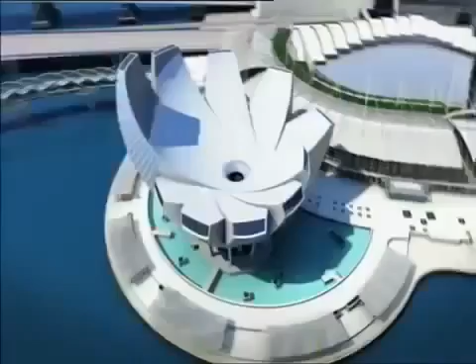Singapore's Marina Bay Sands is one of the world's most complicated construction projects. Engineers have to build not one, but 3 skyscrapers that will shoulder a sky park as big as an aircraft carrier. Worst case scenario, we get stuck. They have to devise ingenious solutions to assemble a 60-meter tall museum of impractical dimensions, install giant artworks, and erect seemingly floating pavilions for shopping and entertainment. If engineers succeed, they will create a virtual city unto itself.

Singapore, the Southeast Asian country, is smaller than New York City. The lack of space forces it to build its largest leisure and entertainment hub to date on a small tract of reclaimed waterfront land. The Marina Bay Sands. It's not one megastructure, but many.

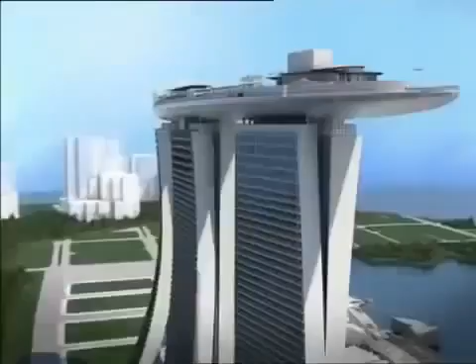Serious challenges lie in the array of buildings that form the unique complex. 3 55-story hotel towers slope at such great angles, they're in danger of buckling under their own weight. An even bigger problem is the hotel's roof. A 340-meter sky park spans its length, containing gardens, outdoor pools, and the world's largest cantilevered observation deck. But how do you build something as big as an aircraft carrier, 200 meters in the air?

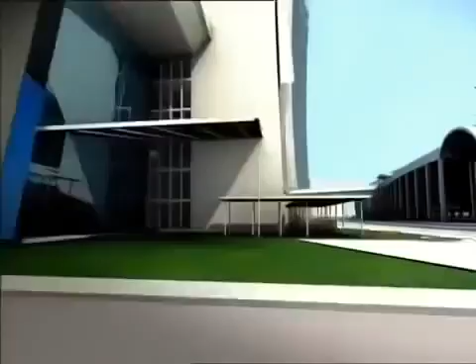In the hotel's atrium, mammoth works of art have to be somehow incorporated into the architecture. Its challenging centerpiece, a 15-ton mass of steel by a renegade artist from Britain.

A 60-meter tall art science museum is designed for maximum visual impact. It will be to Singapore what the Opera House is to Sydney. Only one problem: it seems too impractical to construct.

And a set of dramatic glass-encased pavilions, while themselves pose little challenge, have to be built in water.

The man behind the Marina Bay project understands the risks, but he believes that anything short of astounding will fail. Sheldon Adelson, one of the world's richest men and CEO of Las Vegas Sands Corporation: what we hope to accomplish is to change the face of Singapore tourism, so we expect a very successful development.

That is by far the largest and most expensive single project we've ever undertaken. It'll cost about 5 to 5.5 billion US dollars. It's a lot of money. Now, I know $1 billion doesn't buy what it used to, but by any measurement, it's a lot of money today.

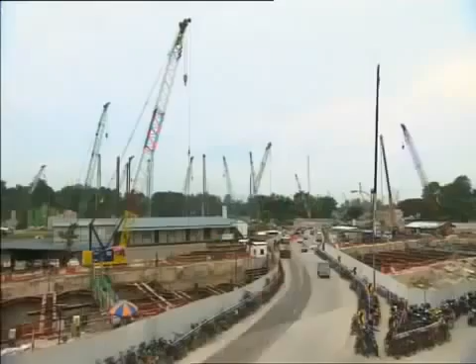On the ground, engineers are more concerned about the reality of building Safdie's vision. This is the North Retail section area. 30-year veteran John Downs is in charge of overseeing the entire project. The design is very, very diverse, and each component of the project is totally different from the others. For a project of this size, you'd expect with the planning, with the design, with the construction, you'd be expecting somewhere between 6 to 7 years. Here is basically a 3-year turnaround.

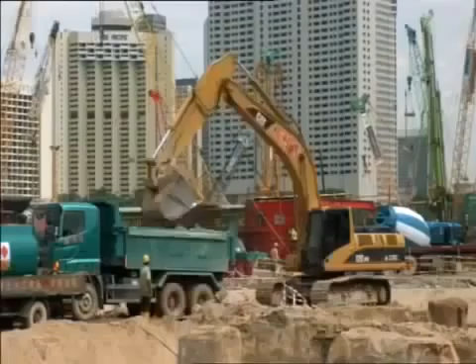The first and most critical construction task is to secure the footprint, though this normally straightforward job proves otherwise, since the site was originally allocated for boats. The complex sits on 560,000 square meters of reclaimed land, part of a decade-long plan to revamp Marina Bay, a former saltwater estuary that's now a freshwater reservoir.

Beneath the reclaimed land, which is essentially a seabed, is a dangerous layer of marine clay. Sometimes called black toothpaste, marine clay has very poor structural properties. If not given complete respect, the unstable marine clay is potentially fatal.

In 2004, Singaporeans discovered the lethal consequences firsthand. A routine excavation in an underground tunnel for the mass rapid transit network causes a collapse, creating a gaping hole in the Nicoll Highway, killing 4 workers.

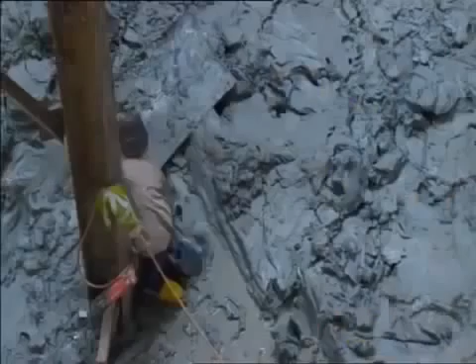The ground conditions in which they were building the Nicoll Highway were not dissimilar to those in which we are encountering here. They had also soft clay, they had similar depths of excavation between 20 and 37 meters. One of the big things that was learnt in the Nicoll Highway collapse was the importance of monitoring movements and the control of quality as the construction proceeds.

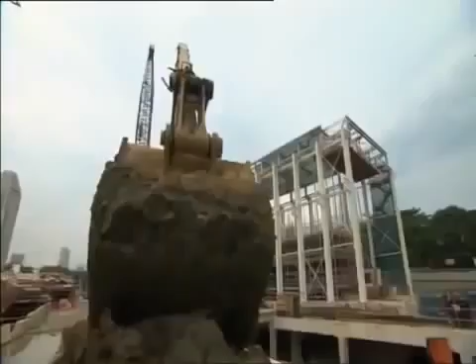Marine clay is an old foe of engineer Mike Barton. He's defeated it in the past by understanding how it behaves. The big problem with marine clay is that it is so soft that when you dig out the inside, the walls will move and potentially collapse and allow all the surrounding water in the bay into the excavation. So, before work can begin, the unstable building site needs major fortification.

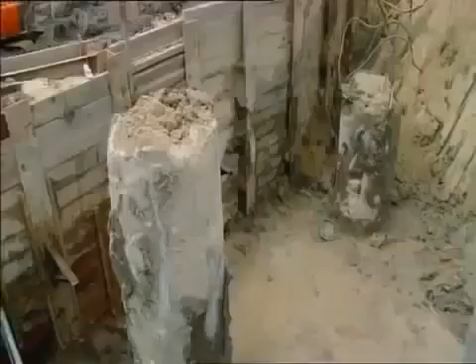To combat marine clay, engineers decide to build giant concrete walls to create stabilizing perimeters for the larger buildings, known as diaphragm walls. Up to 1.5 meters thick, diaphragm walls are steel-reinforced concrete sections, pounded 50 meters into the ground. They form watertight enclosures for men and machines to work round the clock.

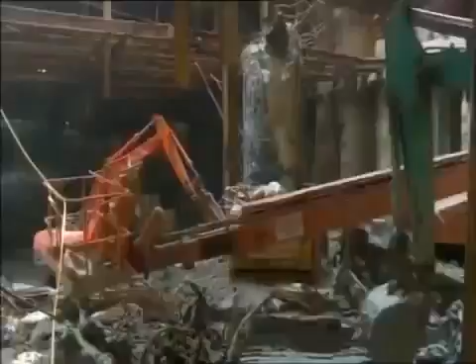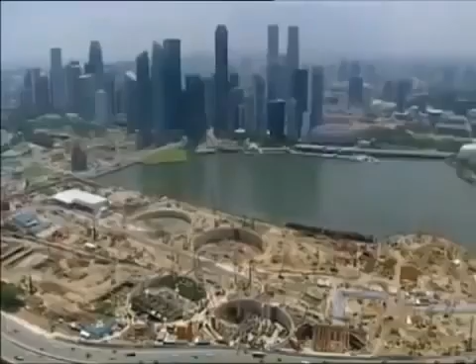In just 1 year, over 4,000 meters of diaphragm walls help produce a rock-solid foundation. The diaphragm walls we constructed in a formation we called a peanut formation, which is 2 circles joined together, and a donut formation, which is circular, are able to withstand very large forces from the marine clay without any movement. They encapsulate an area bigger than a football pitch, enabling us to excavate very quickly and build structure up very quickly.

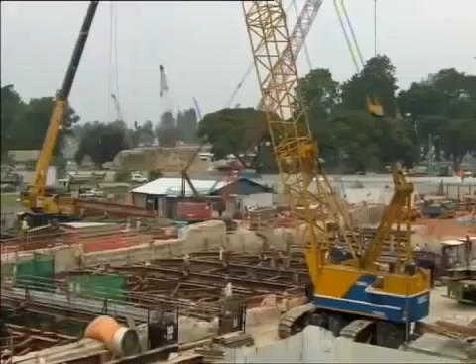Securing the footprint of the Marina Bay project has already taken a year out of John Downes' schedule. He now faces the difficult task of erecting the resort's many buildings in a space of just 2 years. Just managing the whole logistics of that, including the construction methodology, is very, very challenging for us.

To meet his tight deadline, Downes chooses the most direct solution. He hires 16,500 workers to construct every single building simultaneously. It's like leading a small army, so organizational excellence is key.

We're just on the edge of Singapore in the CBD here. So rather than lose the contractors and the workforce to go off-site, we built our own 3-story project office. We have all of our contractors, our subcontractors here. We house our resident site staff. We have our project management team, our construction management team, our design management team, and the logistics here.

Come lunchtime, the monster workforce creates another massive challenge for Downes. He responds by building one of the world's largest site canteens.

We've got 13, 14 different food styles here. You can see by my shape and size that I eat here every day. I enjoy this food. So here you can see the project bakery. It has its own ovens. It's set up for breakfast. We cater for sandwiches during the course of the day. Can I take a sausage roll, please? So, freshly cooked food, straight from the oven. We stand by our products.

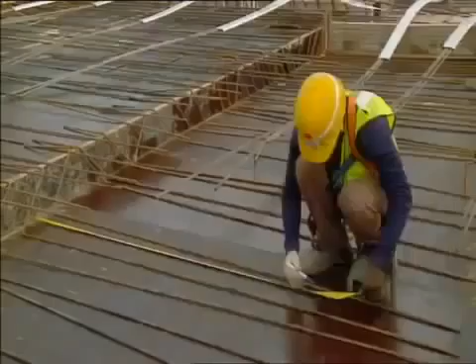The tight schedule also creates problems at the hotel towers, where engineers are already struggling with a congested site. The important thing to do is to make sure they come in and deliver the goods straight away and then get out again. We don't want too many vehicles on site at the same time.

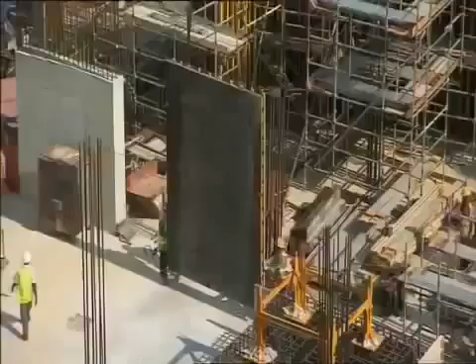To speed up construction and alleviate traffic congestion, engineers turn to a method proven countless times in the field: precast concrete. Hotel walls are made off site in the thousands. Workers laying the floors are so proficient, they produce 1 floor per 4-day cycle. It's an impressive display for a conventional solution.

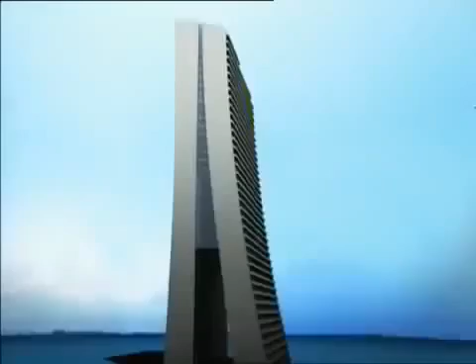But the structure they're attempting is anything but conventional. The key challenge of building the hotel towers is its unusual design. Unlike other skyscrapers, part of the towers slope at incredible inclines. Like a set of collapsing dominoes, the towers could buckle under their own weight if a practical building solution is not found.

It's a major concern for engineer Craig Glover. I've been in the industry for 25 years, done a wide range of projects in many different countries, but nothing compares to this whatsoever. There was nothing we could take reference from across the street, on the next high rise, or across town. This is a new frontier.

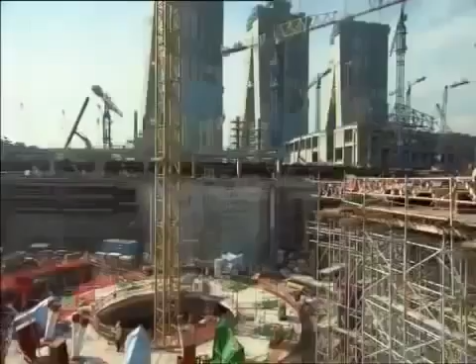Costing a staggering $5.5 billion to build, the Marina Bay Sands could be one of the world's most expensive mistakes if engineers can't solve the tower's problematic structure.

Engineer V.C. Cheong leads the design team, and their solution comes out of left field. If you look at the configuration, it's not a straight tower, it's with a sloping leg. So all this sloping leg actually induces a very huge external force onto the structure. We kind of built it without any support, so we actually formulate a solution to prop up the sloping edge.

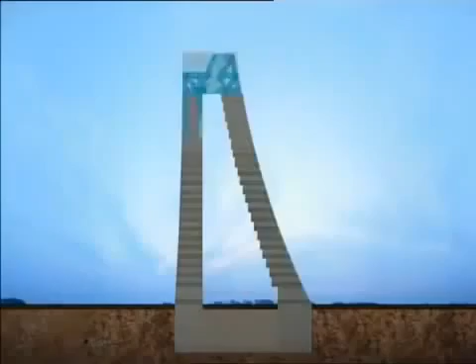Using a technique they've never employed before, engineers build large temporary struts made of strong structural steel. They prop up the sloping towers as they rise. Like a suspension bridge, high tensile steel tendons, also known as tension cables, give an added layer of support inside the walls. In theory, both the struts and the tension cables are temporary and will be removed once giant link trusses connect the towers at the 23rd floor.

The sheer weight in concrete is enough to topple the towers at level 8 if the engineer's calculations are wrong. To reduce the chances of failure, Glover and his team make a radical decision.

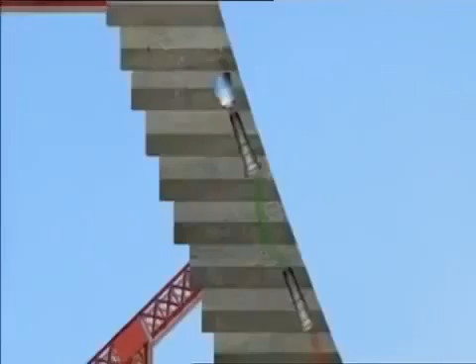Instead of removing the temporary tension cables in the tower walls, they make them permanent supports. I feel good it's in there because it's added strength, it's added support.

We have a twined network here of high-strength steel, and what we do is we bundle these up so they form a cord with multiple strands inside this conduit. We place this conduit inside the walls prior to casting the concrete. So what we then do is once the concrete is cast, we anchor one end into the concrete.

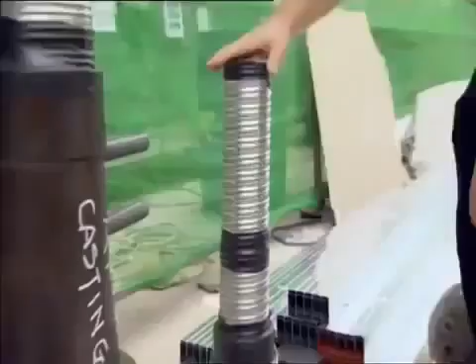So we then put a very high-strength hydraulic jack onto the collar and one by one pull these strands through and tension them up. What that does is basically pull the building back and hold it in place. If these cables were to suddenly break, or if they weren't in place, we wouldn't be able to control the self-weight as we build more and more of the building up. So it's a very important part of the actual engineering of the solution to hold the building in place until we can connect it.

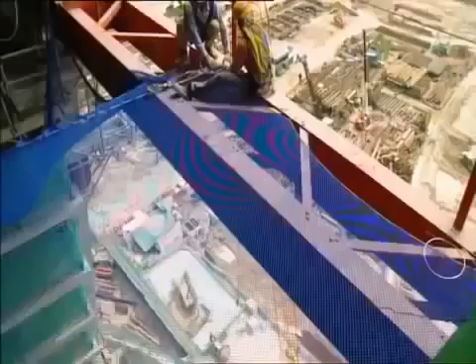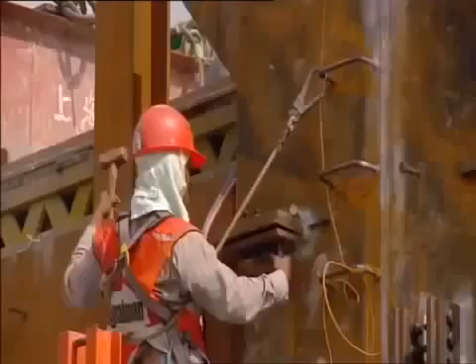Despite the team's quick thinking, the true test of their engineering decisions will only happen once the main support struts are removed and the massive link trusses installed. Link trusses are huge reinforced steel brackets that bind the towers at the 23rd floor. Once their installation is complete, they transfer the sloping tower's weight completely away from its temporary struts.

Once we're satisfied that we don't have any stability issues, then we can bring the large hydraulic cranes in and member by member start to dismantle the struts. We've got a lot of time pressure, so we've just got to make sure that these things keep moving. It's done its job holding up the building, now it's holding up the job.

As the last pieces of support struts leave the site, Glover and his team can finally breathe a sigh of relief. The link trusses are holding the building load. So far, so good. It's a lot of theory, a lot of calculations, but until you really do it and really get it out of the building, you never quite know. I'm always waiting for the phone to call in the middle of the night that something's gone wrong.

Not all the structures have ended up according to plan. The 60-meter-high ArtScience Museum is facing a major design overhaul. Planned as a venue for blockbuster exhibitions on the arts and sciences, its bowl-shaped roof doubles as a 3,000-seat amphitheater.

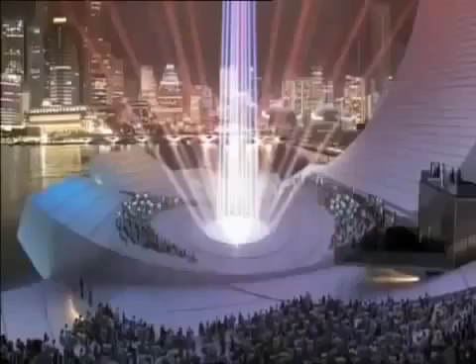Unfortunately for engineers eager to start its construction, architect Moshe Safdie isn't happy with its current shape. Somebody looked at them and said, looks like a bunch of bananas. In fact, Mr. Adelson said it looks like a bunch of bananas. I said, well, if they look like a bunch of bananas, we're not there yet.

It's terrible news for Safdie's design team, especially its principal, Gene Dyer. There are times that Moshe will come in with an idea. We think it's quite exciting. We'll pursue the idea for weeks or even months. He'll come back and say, I want to change the idea. And we've already bought into the idea, so it's a bit frustrating.

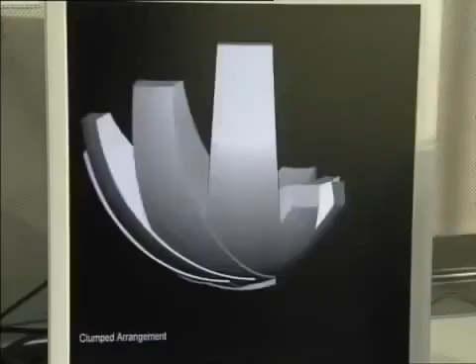To rework the unique geometry and dimensions of the ArtScience Museum, Dyer and his team turned to advanced 3D modeling programs. It not only makes navigating the museum's complex geometric patterns easier, it shortens the process to a matter of days. The model is dynamic and it can be moved by just changing one or two elements. Moshe could experiment, making rapid judgments in a very short period of time about which way he wanted to take the project. This is a process that was impossible to do 10 years ago. Without the computer, this would take years and years and years.

The nautilus form effectively became... To rationalize the new look into a buildable structure, architect David Robbins splits the museum into spheroid segments. We began to look at using different spheroids to define the different upper and lower surfaces of this building. That gave us a very rational way of describing the plan form to our clients.

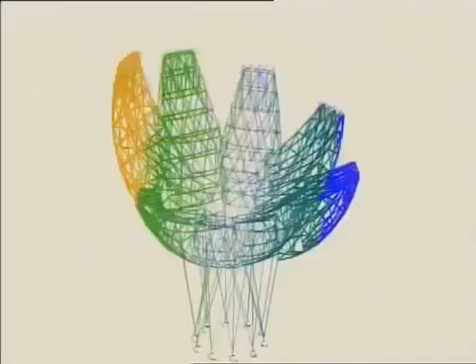After months of refining the design, Safdie is finally happy with the result. The mathematical precision that we gave them made them even more beautiful. It led some people to say, well, hand of welcome. Others said, is that a lotus? And the more ambiguous the associations, the closer I thought we were getting to our target. Because I think the least exciting buildings are those which have overt symbolic associations.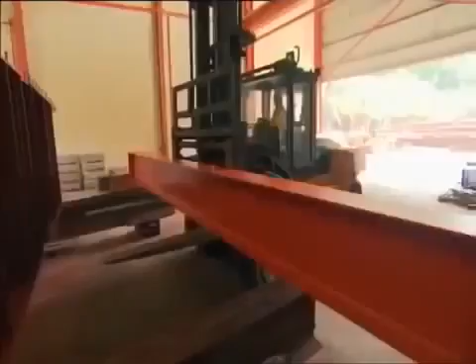Armed with the new design, engineers begin work on the museum's 60-meter-high superstructure. A staggering 5,600 steel elements, weighing some 5,200 tons, are prefabricated to exact specifications. They are then trucked onto site and assembled.

It's like putting together a giant jigsaw puzzle. Each element has to be installed with pinpoint accuracy. If it's even a few millimeters off, engineers will have to start from scratch.

Engineers of the massive atrium at the base of the towers are facing an equally tough construction process.

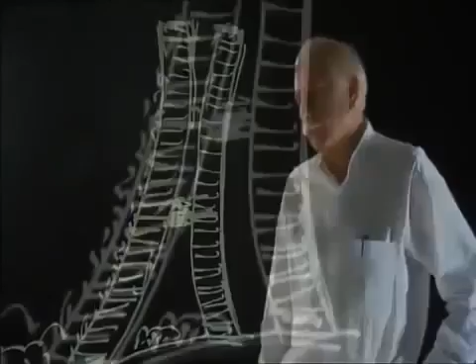Safdie has come up with a challenging design. He wants to inject art into the atrium's architecture, so that visitors will feel like they're walking through a grand Gothic cathedral.

In medieval times, if you think of a Gothic cathedral, there's the architecture, there's the stained glass windows, there's the sculptures on the pinnacles. You cannot draw a line and say art and architecture. Art and architecture are one, they're singular experiences. And I think what we try to do here is come back to this integrative mode.

To create the centerpiece of his vision for the atrium, Safdie commissions renowned British sculptor Antony Gormley. Famous for his unusual approach to art, Gormley is the brains behind the Angel of the North sculpture in northern England.

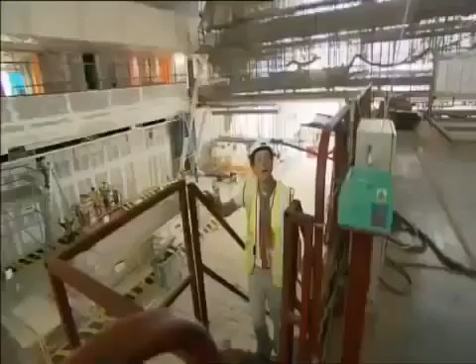What he's about to attempt is proving to be more of a construction challenge than an artistic one. A cloud-like sculpture some 40 meters long, made up of 15 tons of high-grade stainless steel, hung 12 stories above the atrium.

The Angel of the North is, in a way, making a very traditional public sculpture because it's isolated in space at the edge of a valley. You can see it for miles and miles. It's very much about occupying space. This is about activating space. You can't see it for miles and miles. You have to be in the space with it. Each viewer, every person coming out of their hotel room will confront this big chaotic thing and have to find their place in it. I think that's an exciting thing.

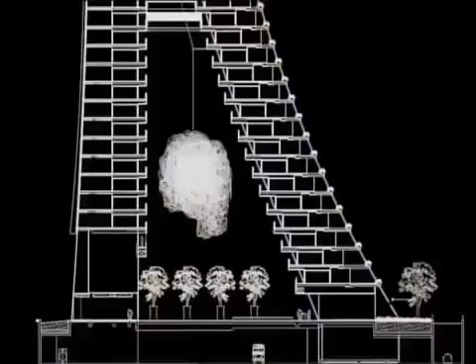Called Drift, Gormley's steel sculpture is so huge and so complex that it can't be sculpted using traditional methods. Gormley's team has to create state-of-the-art 3D computer programs that translate his ideas into buildable plans.

But just as they're about to begin construction, a bombshell drops. September 2008, a global financial crisis wreaks havoc on markets. The flow of the hundreds of millions of dollars that keep the Marina Bay project going every month suddenly stops.

For engineer Matthew Pryor, it's a massive blow. I feel devastated. I mean, it couldn't be worse. Probably the worst day of my life professionally. There's no more money coming through. So unless we put some funding in place or there's something, we're going to have to shut the jobs down. But there's a tough decision to be made, and we don't know what we're going to do just at this point in time.

With the future of the multi-billion-dollar project plunged into doubt, all eyes turn to the man behind it, Sheldon Adelson. The next move of one of the world's richest men will determine the fate of the mega construction site.

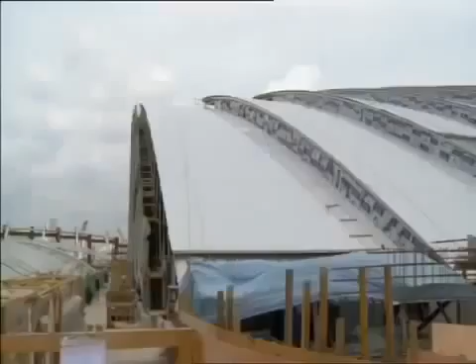The 2008 global financial meltdown is a haunting echo of the 1990s Asian crisis. Back then, progress on Shanghai's World Financial Center came to a complete halt for 5 years. For Adelson, that's simply not an option for the high-profile Marina Bay resort.

His vision of changing the face of Singapore tourism is at stake, and so are billions of dollars of investment from his Las Vegas Sands Corporation. He prefers finding a stopgap solution to weather the storm.

Throughout history, there has never been a trend that went straight up, nor a trend that went straight down. So it goes up and down. It's only a matter of time when things will recover.

In a bold move, Adelson pledges his vast personal wealth to the completion of the project, effectively ending any speculation of failure.

There's a massive sense of relief in the company. I mean, everyone's pleasantly surprised how quickly we've got through this and the fact we could hold it together and get it going again. So euphoria is probably the best way to describe it.

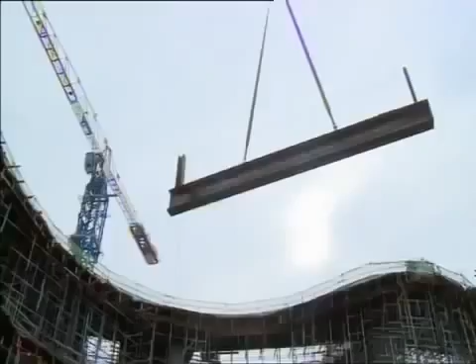With the crisis averted, construction on the 3 55-story hotel towers, the casino, theatres and convention centre resumes at pace. Everywhere you turn, steel is being installed. It's vital reinforcement for every concrete structure on the 15.5-hectare site.

For one project at the tower's atrium, steel is more than just reinforcement. To construct the 15-ton Drift sculpture by British artist Antony Gormley, engineers had to first laboriously prefabricate it into over 70 segments.

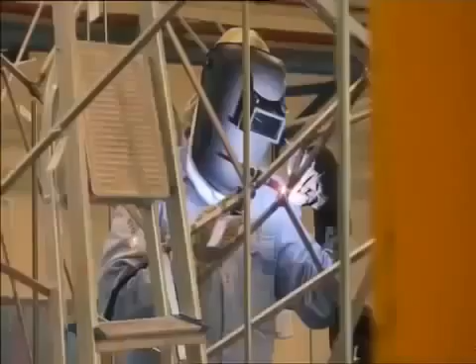The segments are then welded into 8 slices and will ultimately form the sculpture. It's a tricky operation, but engineers are able to complete it swiftly due to a system of codes and numbers that enable them to quickly identify what goes where.

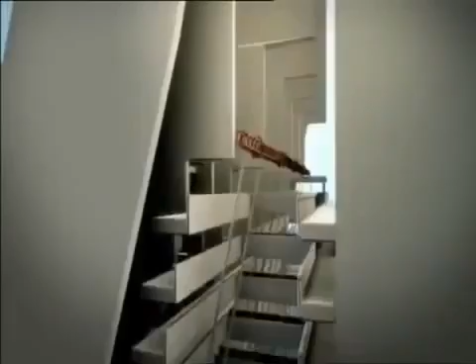Once all 8 slices of Drift are fully assembled, it's lifted up into position by a temporary lifting frame. A massive box truss on the atrium ceiling then takes over the load. In theory, the box truss will support the weight of the lifting frame as it's being lowered down.

It will be a heart-stopping moment, especially for engineer Graham Stevenson. The lifting frame is about 9.5 tons, so when it picks up and gets some momentum, there's a potential that it just wants to flick over and rotate through its full 90 degrees, and we won't have it under control.

Stevenson's solution: 4 powerful automated hoisting drums located at the 4 corners of the frame. They allow workers to control the strength and speed of the operation with high tensile steel cables.

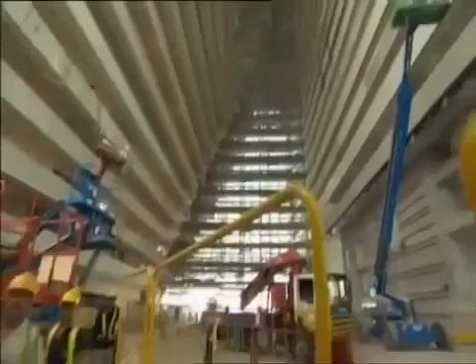A spotter at the top determines the pace of the procedure and marshals the team. With their preparations complete, it's time to face the moment of truth. Sculptor Antony Gormley is as anxious as any of the team.

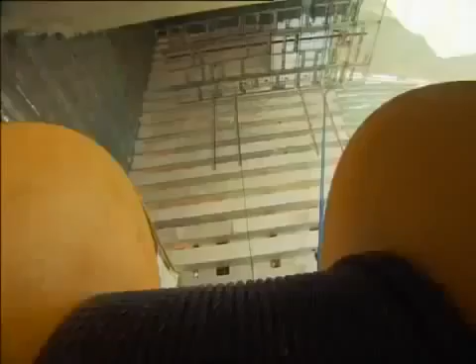The entire operation is estimated to take up to 10 hours to complete. As soon as the frame is in motion, there's no turning back.

Midway through the lift, Stevenson receives reports of a potential problem. 22 story, number 7 temporary cable, scaffolding touching the cable. Why have you got the temporary cable touching the transverse? Is it just the end of a tube? Yeah. So you can just cut the tube? Yeah.

Problem solved. But what was previously an estimated 10-hour procedure now turns out to be a 24-hour marathon lift.

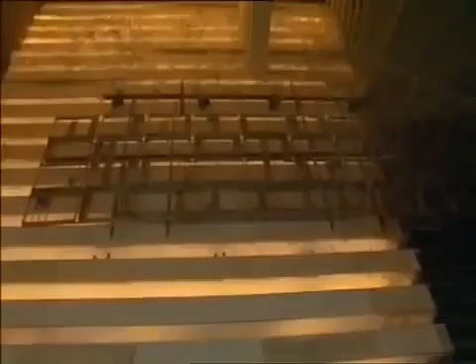At 6 a.m. the following morning, they complete the job. Absolutely fantastic. The Gormley is now finally in its final position, so really an end of a long and exhausting day, and big thanks to everybody, but it's finally done.

While the drift settles into its new home at the hotel atrium, elsewhere attention is focused on one of the project's key features, the Crystal Pavilions. The two glass-encased buildings by the promenade are set to be the resort's premier shopping and entertainment complexes.

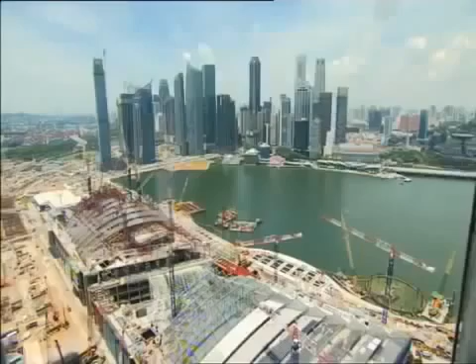But before engineers can make them a reality, they have to secure their footprint. And already a major obstacle threatens to sink their objective. The Crystal Pavilions are situated within the confines of Marina Bay, so to found it, engineers have to find a way to build in 6 meters of water.

The responsibility of tackling the problem falls on the shoulders of engineer Kurt Vella. I'm from Sydney. The underlying foundation in Sydney is sandstone, it's rock. All you need to do is just dust off the surface and you can build skyscrapers on it. Here it's very different. All the structures have to be heavily founded.

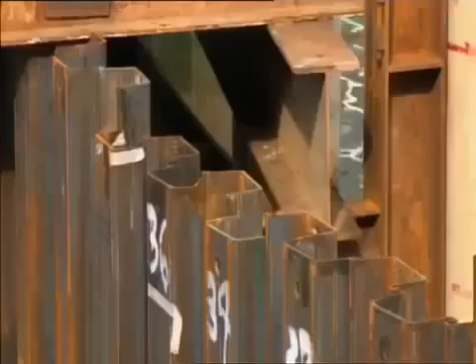To keep water out of the construction site, only one solution seems viable for Vella and his team: a waterproof steel structure called a cofferdam. This temporary formation surrounds the worksite with a circle of steel sheet piles, creating an impenetrable shield that locks out the water, keeping the workers safe within.

For the job, they rope in a 12-ton vibro hammer. It punches the sheet piles deep into the earth, making the cofferdam rock solid and resistant to movement.

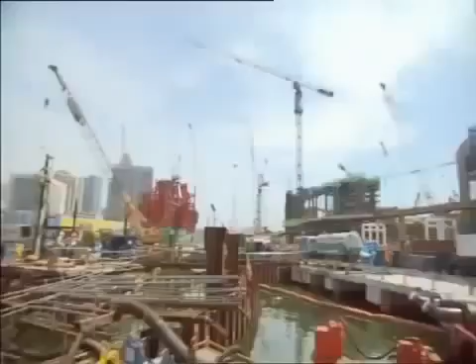With the cofferdam secured, engineers deploy powerful diesel pumps and run them 24 hours a day, ejecting any water that remains within the walls.

This last step comes with inherent dangers. The force of the water outside creates what engineers call hydrostatic pressure. In theory, it's powerful enough to force water through any gaps in the cofferdam.

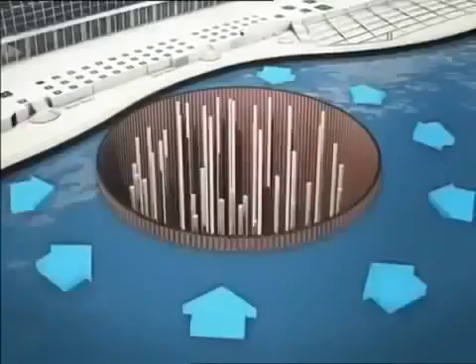It's something that Vella prays will not happen. There's a bit of hesitancy and concern because we've got to build this building in the middle of Marina Bay. Everybody can see what we're doing, so if it leaks, it's a problem. If it fails, if it moves, if it collapses, it'll be an absolute catastrophe.

After a day of pumping, Vella's worst fear comes true. Parts of the cofferdam are leaking.

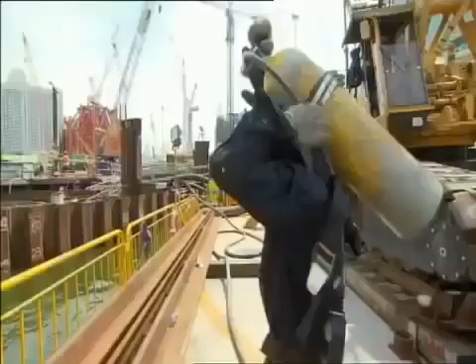To rectify the problem, Vella orders a team of 8 divers into the water on 10-hour shifts. Their mission: find out where the water is being forced in and plug them shut with epoxy resin.

Anson Lee is an 8-year diving veteran. The toughest part of my job is the environment. The visibility is poor here, it's totally zero, I cannot see anything here below. I solve that by feeling the suction and then feeling out the thing. You have to overcome all the fear that you can't see under the water, but okay, I feel proud to be one of this team to build this thing out.

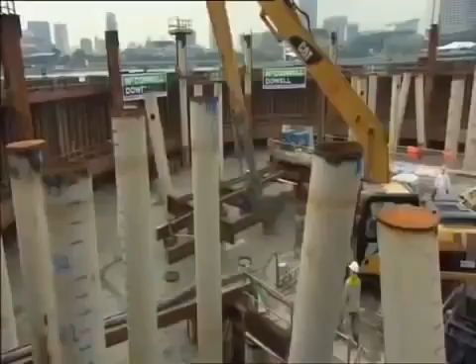After 2 weeks of hard work by divers and the pump crew, the job is finally complete. Kurt Vella can also breathe easy. Every job is different, every job has its challenges. You plan and prepare, you try and identify your risks in advance, and you try and come up with contingency plans. And that's what's really enjoyable from my perspective. That's what gets me out of bed in the morning.

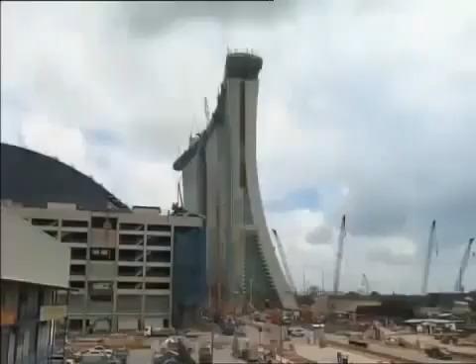After 2 years of battling the elements and overcoming difficult construction milestones, the 3 sloping towers of Marina Bay Sands can finally celebrate their topping off ceremony and move on to the next phase.

But a destructive force of nature threatens to throw a spanner in the works. With climate change predicted to affect the pattern of Southeast Asia's typhoons, Singapore may one day experience the destructive tropical storms plaguing its northern neighbors in the Philippines and Taiwan.

When that happens, typhoon-force winds could spell disaster for the hotel towers, especially the 340-meter sky park sitting on top of it. The force of the wind can make both buildings sway dangerously, causing irreparable damage to the structures.

The Sky Park, offering 360-degree views of Singapore. The visionary design will have enough surface area to park 4.5 Airbus A380s.

But when architect Moshe Safdie first mooted it, it stemmed from a purely functional need. Luxury hotels, as we think of them, always have lots of open space around them, gardens, at least in the kind of tradition. But we didn't have much space left.

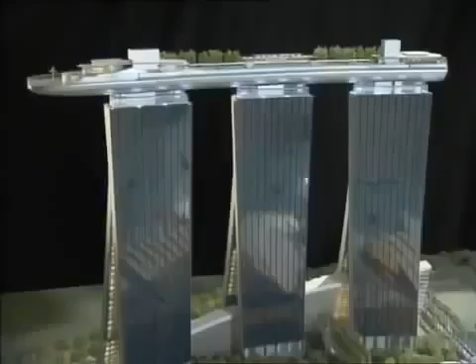Safdie's revolutionary idea scores points for ingenuity, but it clearly isn't what nature intended. Typhoon-force winds threaten to rock the towers and its sky park, causing unimaginable damage.

If engineers are to make the building a reality, they'll need a rock-solid solution. Still got to do all this cladding.

Engineer Tony McKee has little time to make things happen. At the moment, we're running a couple of weeks behind what we'd originally planned. We're not entirely happy about it, but at the end of the day, we've got to do this safe and we've got to do it properly.

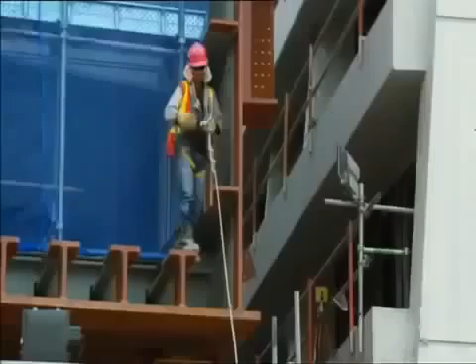You know, you're safe close to the... To fight the enemy, McKee knows he has to first understand the enemy.

He hires leading US wind engineers CPP to carry out extensive testing on the towers and Sky Park. Their mission? Find out how Singapore's potential wind forces affect the buildings. We turned that upside down.

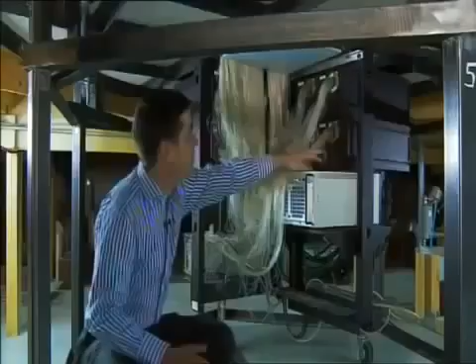Wind engineer Roy Denoon oversees the process at their state-of-the-art wind tunnel in Fort Collins, Colorado. The thing that makes this really special is the fact that we have this sky park running across the top, linking all the towers together.

So whereas normally with a normal tower, we'd measure the loads on the tower in isolation, with this one, what we're needing to do is to measure the loads on all 3 of the towers at exactly the same time. So that way we can know how the towers are going to move relative to each other, so we can make sure that they're not going to put excessive strains or movements into the sky park.

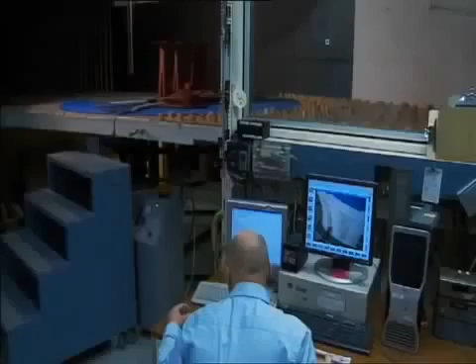During the tests, a scale model of the Marina Bay Sands towers is blasted with 40km/h winds to simulate faster typhoon winds in reality. Over 1,000 pressure measuring instruments inside the model register how the winds affect the buildings. At the end of the tests, engineers confirm that the 3 towers can deform by some 200 millimeters during the fiercest storm.

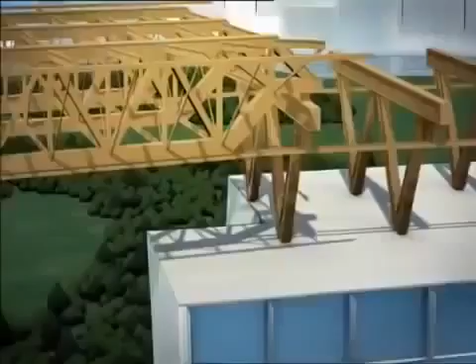Engineers quickly figure out a solution: movement joints. Inspired by bridge engineering philosophy, movement joints are essentially gaps located between the concrete towers. The huge gaps allow for movements of up to 250 millimeters.

Aluminium and stainless steel plates act as sliding components. They can move back and forward over each other, a little bit like you'd see in a flexible bus, where you have that articulation happening in the middle. It's a similar concept to that.

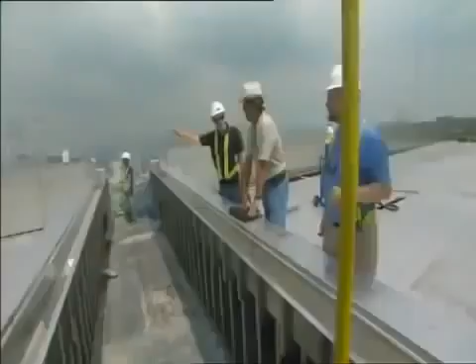To accommodate the differing movements of the three towers, engineers install multi-directional steel bearings below the Sky Park. The solution scores major points with Tony McKee. Only one problem. It won't work with a rigid structure containing 1.5 million litres of water.

Any movement in the joints could fracture the Sky Park swimming pool, endangering lives and property below. With the help of US pool builders Natare, McKee quickly develops a solution, but it's completely unproven.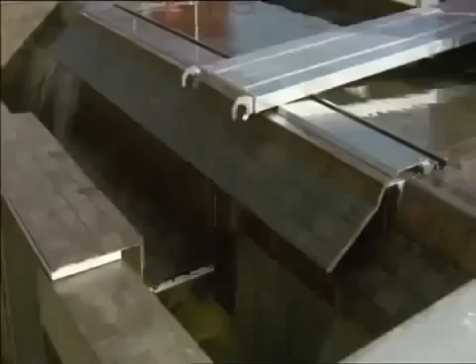A secondary system of movement joints built into the pool itself. The plan: to split the pool into 3 smaller 50-meter units. Steel top hats then conceal the gaps. Huge basins catch any runoff pushed up by the moving pools.

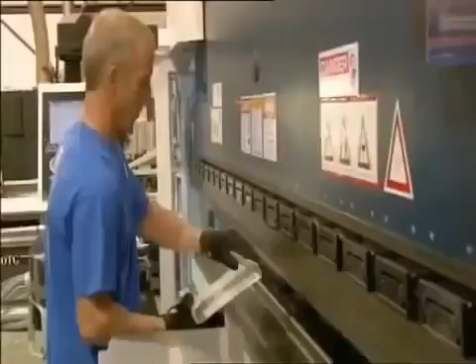McKee knows he only has one chance at making this work. So he commissions a trial by water.

What we've got here is the side of the swimming pool, which replicates the movement that we're going to get between the towers. And what the Natare guys have come up with here is a simple track system which can be pushed back and forward by a forklift. And that replicates the full range of motion that we have on the swimming pools, which can be 0 to 250 millimeters either way.

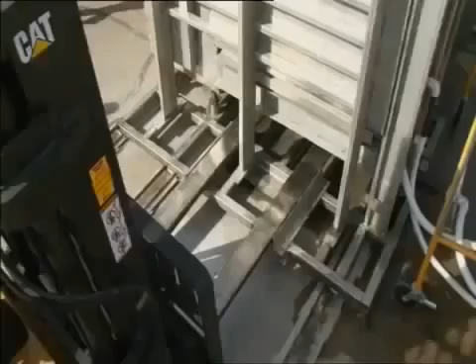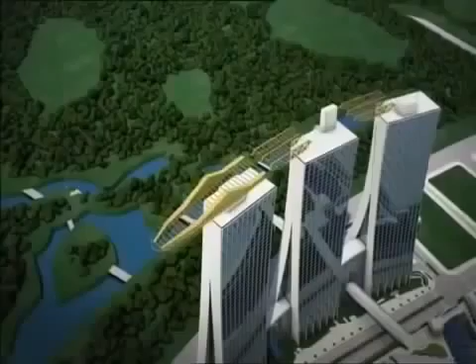It takes engineers weeks of testing before they're completely satisfied. Armed with the final results, McKee can now safely begin construction of the Sky Park. Consisting of some 10,000 tons of steel, the Sky Park is as big as an aircraft carrier. The most practical way for engineers to construct it is to break it into 14 segments on the ground before assembling it at the top of the towers.

There's no room for miscalculation at 200 meters in the air. Each segment is carefully prefabricated and tested by steel specialists Yongnam, and then trucked to the site independently.

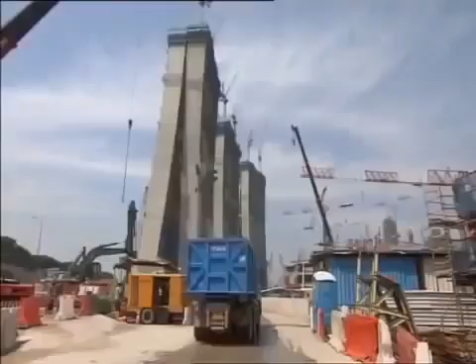From the very beginning, McKee and his team anticipate that their biggest challenge will be lifting the 2 largest segments of the Sky Park, the box girders. Measuring 80 meters long, their combined weight is a staggering 1,400 tons.

How do we feel? A little bit of apprehension. It's a significant lift that hasn't been done before. If something goes wrong, it could be really significant for us.

To reduce risks, McKee turns once again to proven bridge building technology. In a process known as strand jacking, giant temporary lifting gantries made of strong structural steel will use powerful hydraulic jacks to lift the box girders up to the top of the towers before sliding them into place. It will be the longest and largest lift of its kind in the world, and McKee needs the best in the business. He puts a pioneer in the field in charge.

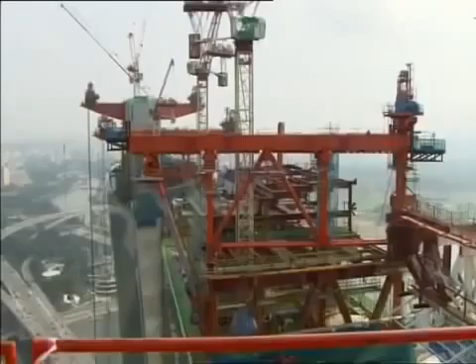Swiss-French company VSL. Engineer Eddie King and his team have successfully raised bridges, stadium roofs, and even Ferris wheels.

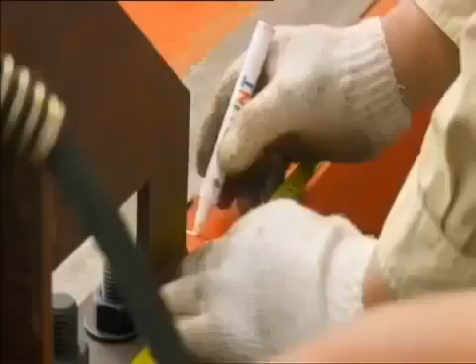The toughest work of my work is you have to plan it everything very precisely, because everything has to be set up in millimeters. So we have to lift up and slide it in and position it in 5 or 10 millimeter accuracies. If we don't do it properly or don't do it safely, the biggest hazard is the thing can fall down to the ground.

Other factors further complicate the lifting process. Due to an increasingly tight schedule, the team is forced to conduct the lift during Singapore's annual monsoon season. It's almost impossible to predict when a tropical storm will hit. When it does, the accompanying lightning strikes can endanger lives. And because the whole operation takes place meters from a jam-packed highway, curious onlookers will be able to see any mistakes the engineers make. It's a potential public relations nightmare.

Worst case scenario, we get stuck. And then we've got to figure out how to release it, how to continue lifting, because basically once we get going, we keep going. Okay, people, okay? Okay, now I stop, huh?

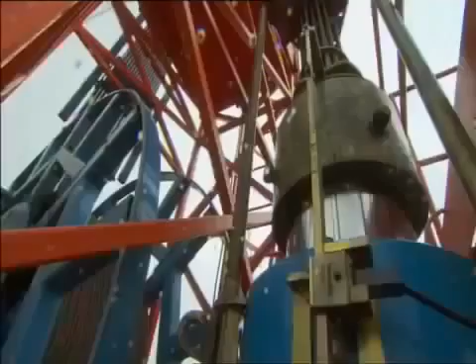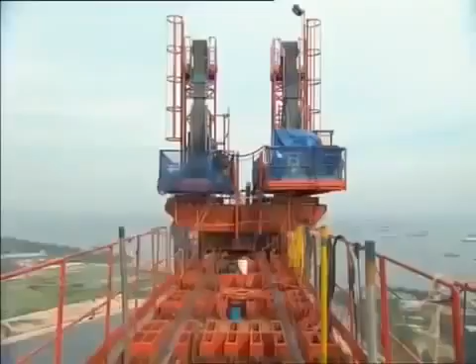During an estimated 16-hour lift, the box girders will move at a cautious 14 meters per hour. Eddie King and his team constantly check their weather gauges for any incoming storms. The hydraulic jacks are also inspected regularly for overheating. No one wants the operation to stall in mid-air.

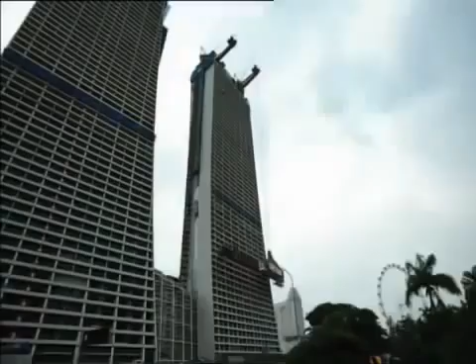Despite the team's best efforts, Mother Nature catches them by surprise. Okay guys, rain is coming, it's better we stop here. An approaching downpour threatens to grow into a lightning storm. We are at 200 meters above and surrounding buildings are quite far away, so there's a chance of lightning striking the high point like this. So we got to stop and wait until the weather gets better before we continue our lift.

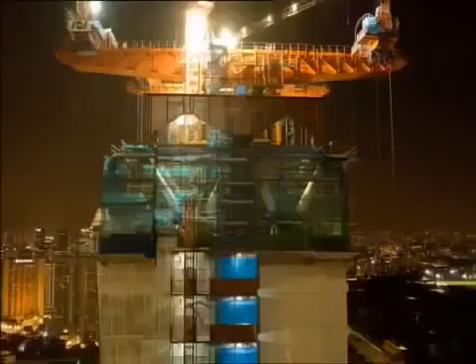After a tense 3 hours, the lightning threat passes, and the operation cranks back to life. By the time the box girders slide into position, it's past midnight. Everything went quite smooth today, so we hope tomorrow we can do the same, smoothly bring it in and transfer to the permanent position.

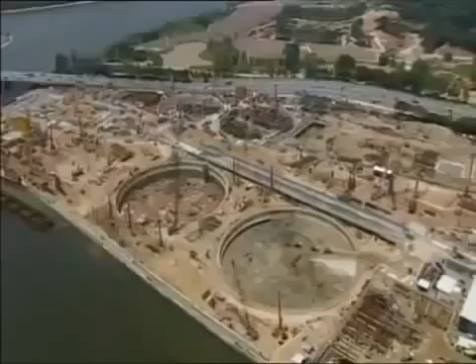With the lessons learned from the box girder lift, the rest of the segments go up smoothly. As the final piece rises into place, Singapore is already marveling at the team effort behind one of the world's most ambitious building projects. In just 3 years, engineers overcame seemingly impossible construction challenges, defeated marine clay, engineered ingenious design solutions, and survived the most debilitating financial crisis since the 1930s.

As the finishing touches are put on the resort, the stage is set for an opening party, Singapore style. Those involved reflect on the project that has already far surpassed their expectations.

It's a bit kind of overwhelming, you know. I'm in the process of disconnecting the umbilical cords, not easy for an architect. This type of project probably only comes around every 25 years or so. So it's been a lot of hard work, extremely challenging. I really can't imagine, I couldn't list the number of challenges we've overcome along the way to get to today.

Everybody is saying this is kind of a miracle, you know, never seen anything like it. And it's rewarding, it's nice. The Marina Bay Sands, Singapore. Proof that with visionary design and engineering know-how, megastructures can still defy the odds and fulfill the wildest dreams.